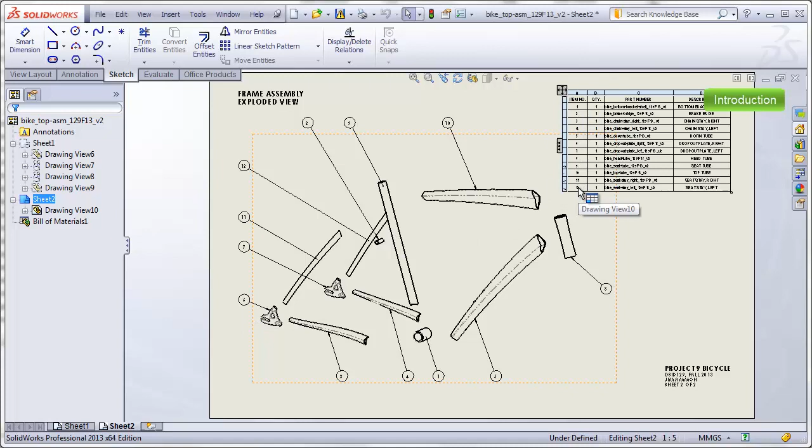The second sheet is going to show an exploded view of the frame components before they are welded together. This sheet includes a bill of materials for the frame and bubbles pointing to the various frame components that correlate with the item numbers in the bill of materials. We also have a little bit of annotation on both sheets.

Before starting, you should have your entire bicycle assembly completed. However, don't worry if you have to go back and make changes. Those changes will be reflected in the drawing.

You also need to have an assembly file of the bike frame components completed, and this assembly file needs to have an exploded configuration added to it.

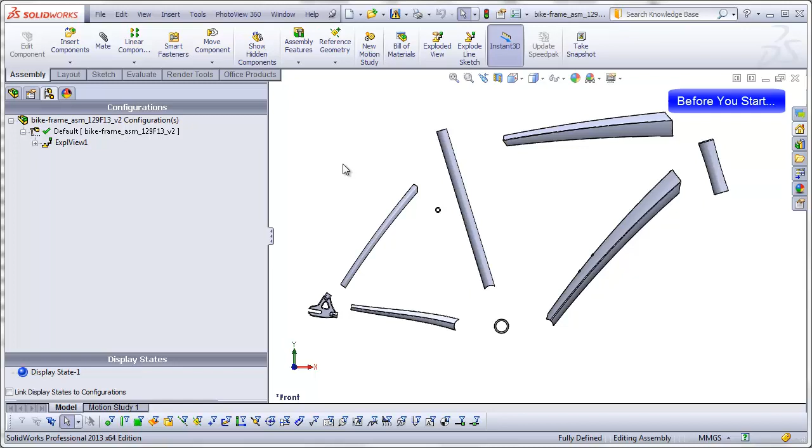Ideally, when you made this exploded view, you did it with a particular viewpoint in mind that you're going to be seeing when this explosion is in the drawing. In my case, I made a custom view and saved that view. In this case, it's custom ISO, and this is the orientation I plan on seeing in my drawing.

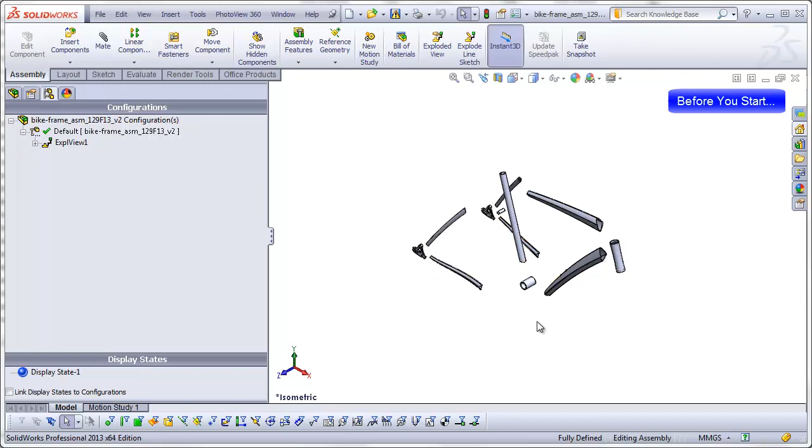It's possible that you did not make a custom view and were planning on just using the isometric view, or maybe you weren't thinking about a custom view when you had the frame oriented a particular way. If you want the frame to be oriented a particular way in the drawing, make sure you have it oriented while we are looking at the assembly.

Hit your space bar, click on New View, and then type in a new view name for that, and OK. Later, when you insert this assembly into your drawing, you will actually be able to pick this custom view for the drawing.

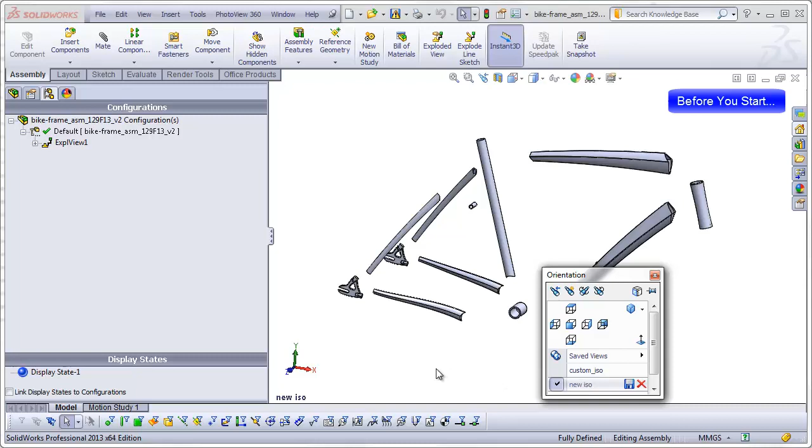Now, before I start, I think it's convenient to have both my bicycle top assembly and my frame assembly open in Solidworks. Now I will begin the drawing process by going to File, New, Drawing, OK.

For this drawing, we want to use a B-size sheet, which is 11 by 17. We have an option of displaying a sheet format. This is the type of sheet format that's often used in engineering documentation, but as I mentioned before, we are just making an industrial design concept, and this won't be a controlled document. So I'm going to uncheck Display Sheet Format, which is going to leave us with a blank sheet, and I will say OK.

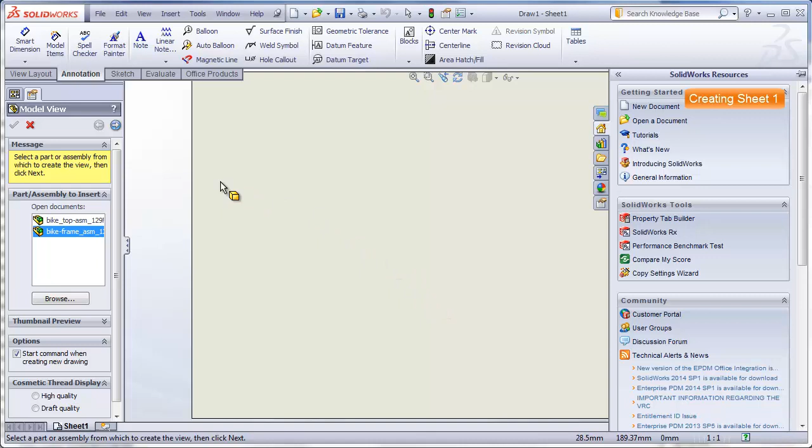For now, I'm going to X out of this Model View Feature Manager. Let's get rid of this, and that's going to leave us with a blank sheet that's 11 by 17.

Here in the feature tree, we see Sheet 1, and down here we have a tab that says Sheet 1. The first thing we want to do is right-click on that tab, go down to the bottom where it says Properties. Unfortunately, this is appearing off of the camera view, so I click on Properties.

This brings up a box that indicates the scale that the sheet is set at, and it also has the projection type. First angle projection is used in Europe, third angle in the United States. We definitely want to make sure that this is checked on third angle. Now we can say OK, and we are ready to add some views to this drawing.

Go to the View Layout tab and click on Model View. This will put into the Feature Manager box the 2 documents that are currently open, the top assembly and the bike frame. We want the top assembly.

We'll click on that, and if we're not sure if we have the right document here, we can always open up the thumbnail preview, which shows us what that document looks like. Then we have to go to this blue arrow that says Next, and we choose the view orientation that we want to use.

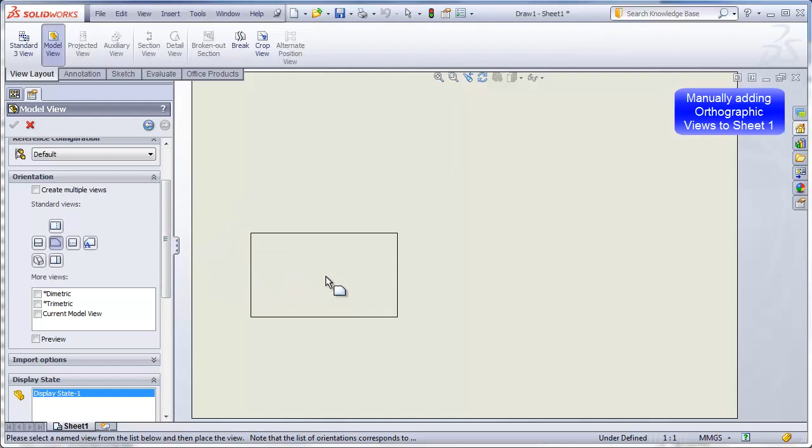The default when we add a new model view is to go to the front view, and that's what we want. So all I have to do is bring my cursor out into the drawing area, and we see a preview of the size of the view, and just left click down. And there is our view of the bicycle.

I'm going to hit the escape key and hide all types so I don't see all the sketches that were present in all the different parts.

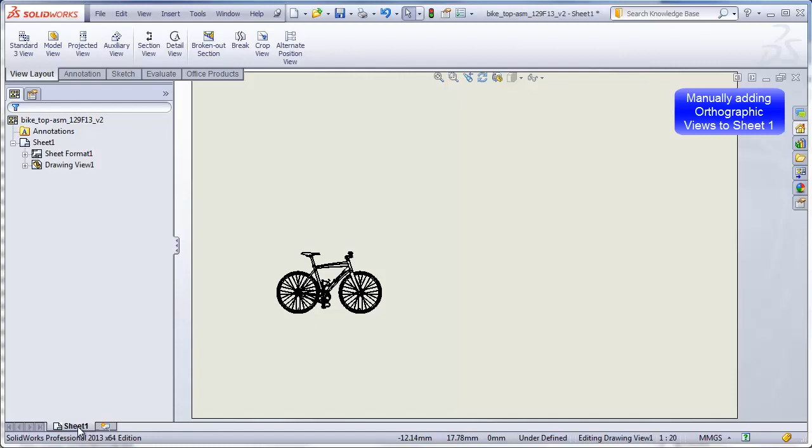Now, if we look at the bottom here, we see that SolidWorks has tried to help us with the scale of this view and has changed the sheet scale to 1:20, meaning we're seeing this at a scale of 1/20th of real life size. If I right click on sheet 1 again and go to properties, I see here it's also been set to 1:20. I think something like 1:4 scale is going to work a little better.

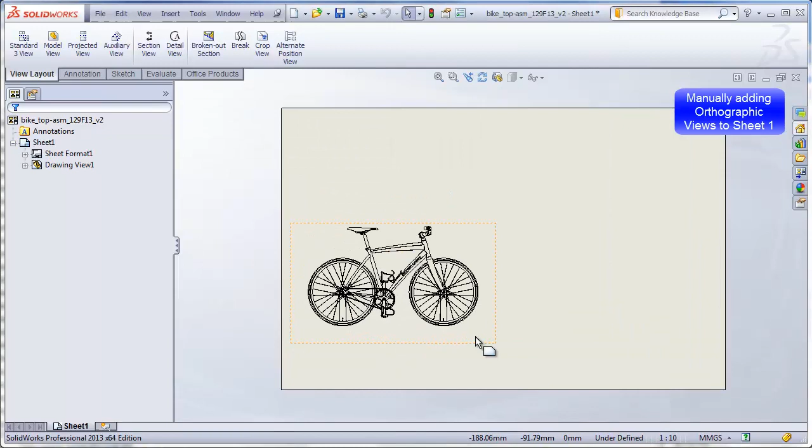Actually, that's way too big, so let me try one more time. I will change this to 1/10, and that looks like it'll probably fit when I add some additional views. We can change this as many times as we want.

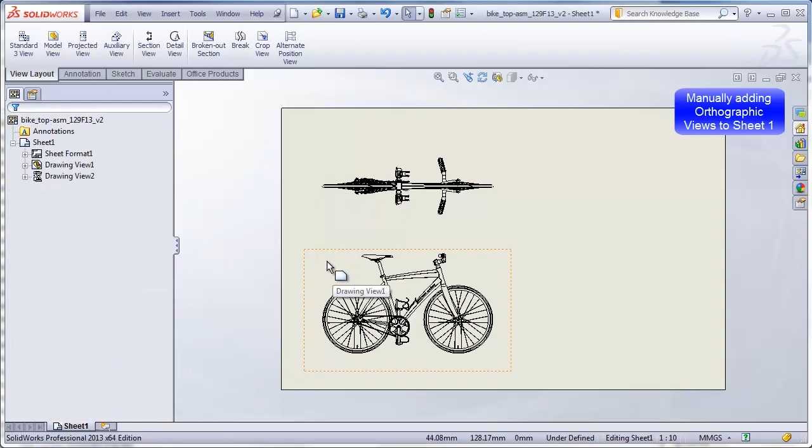I've got my front view. I'd like to have a top view and a view on the right side, which is actually looking straight at the front of the bike. Clicking on this view, I now go up to projected view and drag upward, giving us our top view. Now clicking on our front view again and projected view, this time dragging in this direction, gives us the right side view.

If I drag to the left, we see a left side view, and if I drag downward, we would get a bottom view. Now we want to add that isometric view over here.

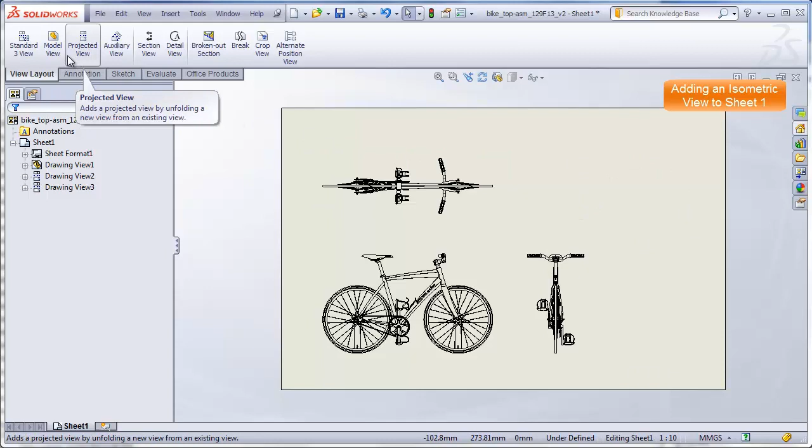So once again, we have to hit model view because this view will not be projected from any of these views. We're already set up for the top assembly, so just hit next. This time we want to select an orientation that is isometric and drag this out into place.

SolidWorks has again tried to help us out by making this a scale that is way too small. If we simply click on this view, it opens up a feature manager just for this view. And if we scroll down to the bottom, we see that SolidWorks has assigned a custom scale to this view instead of using the sheet scale.

If we want this view to match the sheet scale, all we have to do is click on Use Sheet Scale, and we see the view has gotten larger.

And there's no reason why this has to be at the sheet scale. We can always make this a little bit bigger or smaller if we have to, just by going to Use Custom Scale, going down to the User-Defined pull-down, and then choosing the scale we want. If none of those satisfy us, just click on User Defined, and that lets us type in exactly the scale that we desire.

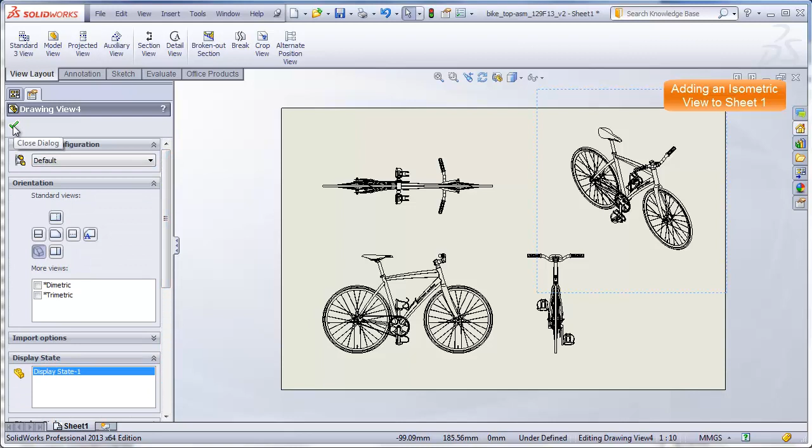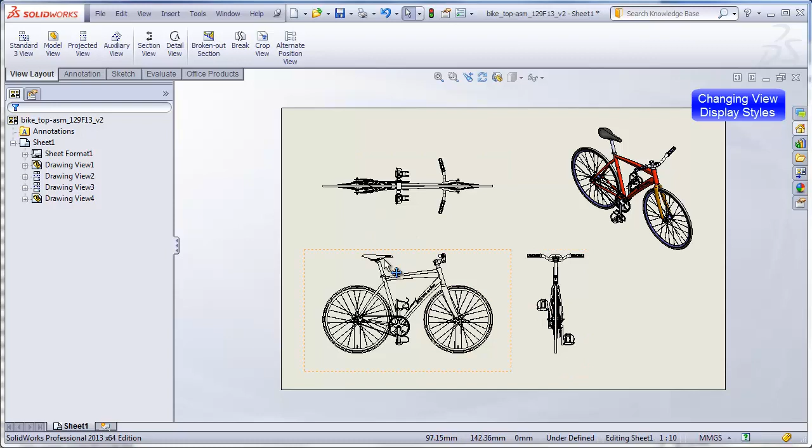I mentioned before that I wanted this view to be shaded, so I just click on this view, go up to here under Display Style, and this is the same display styles that you normally find in your part files, and we will go down to Shaded with Edges. This display style for the orthographics was set to default to Hidden Lines Removed.

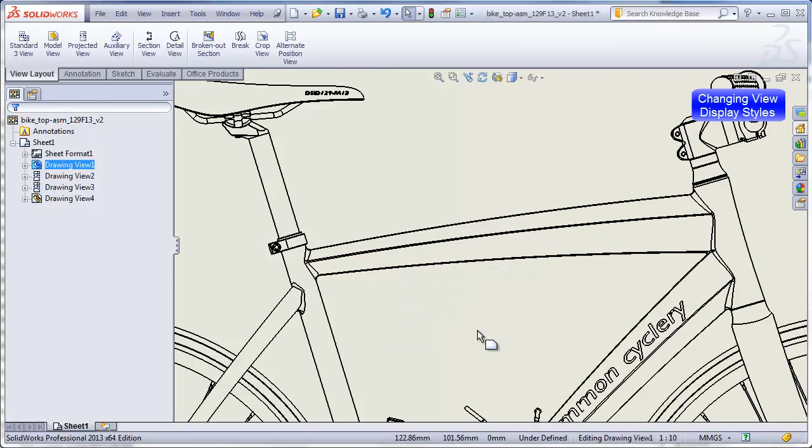If it didn't default to that, all you have to do is change that with this control. If we zoom in, we see that all of the lines are showing, including the tangent lines. And this can get very distracting in a highly detailed drawing like this.

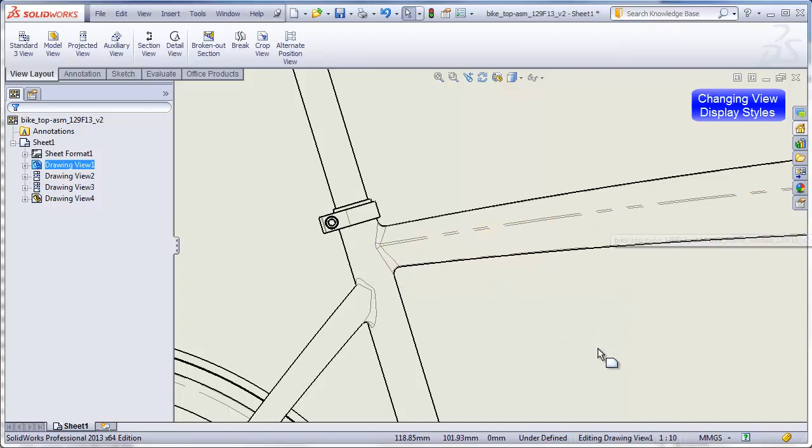So what you can do is right-click on the view, go to Tangent Edge, and set it to Tangent Edges with Font. It changes the tangent edges to have a centerline style font at a thinner line weight. So you can still see the tangent edges, but they're a lot less distracting. I find this to be more pleasing to look at.

Now you have to do this for each of the views individually. It won't update the other two views if you do it on the front view.

On the shaded view, you might consider another option. Right-clicking on that view and again going to Tangent Edge, you might want to change that to Tangent Edges Removed. That will leave the edges wherever parts come together, but those tangent edges will just be seen by virtue of the shading and not by virtue of any lines.

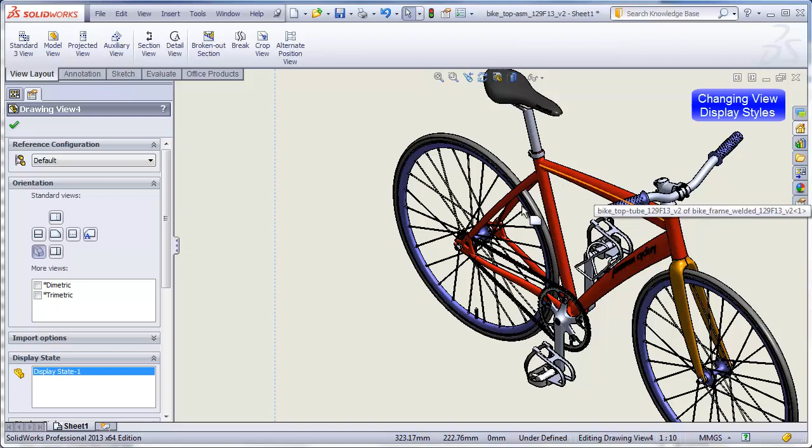Now we added a front view, top view, and right side view, and these are actually the standard 3 views. So if I delete these, I can show you a different way to add these views.

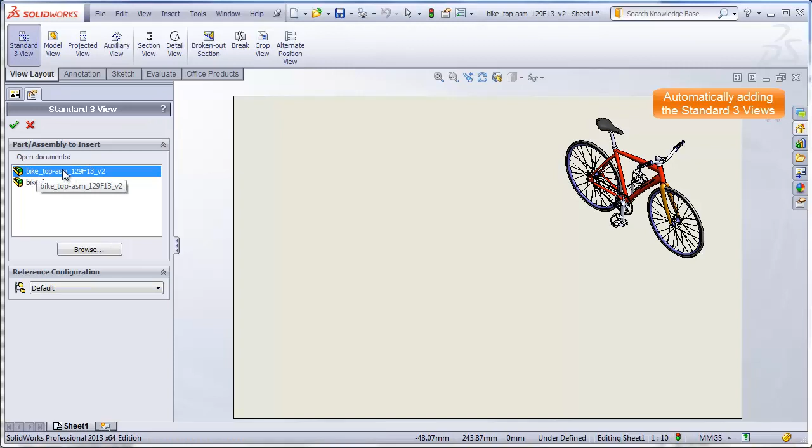I click on the standard 3 views, select once again my top assembly, hit the green check mark, and that drops in the 3 views for me automatically.

Unfortunately, it decided to rescale them once again, so I have to go back to my properties, right click, go down to properties, and I see that the properties haven't changed, so it must have changed the scale on the view itself.

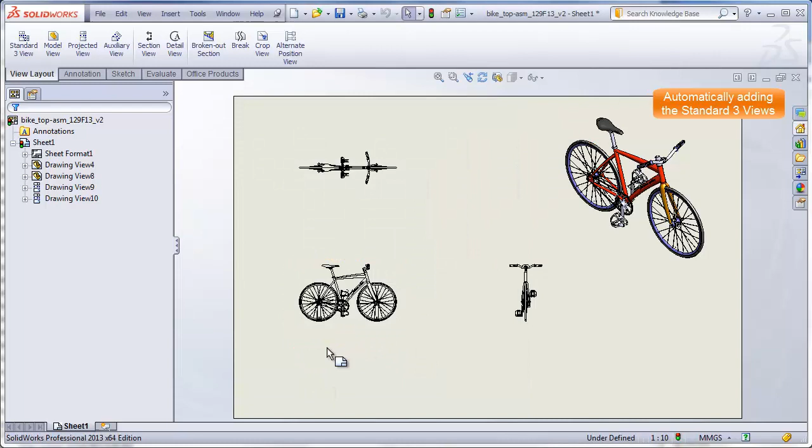So clicking on this view and going down to the bottom, I see yes, it did change it to a custom scale, so I just use sheet scale in this case, and that has brought it back to the scale that I want. I would have to go back and change those tangent edges again.

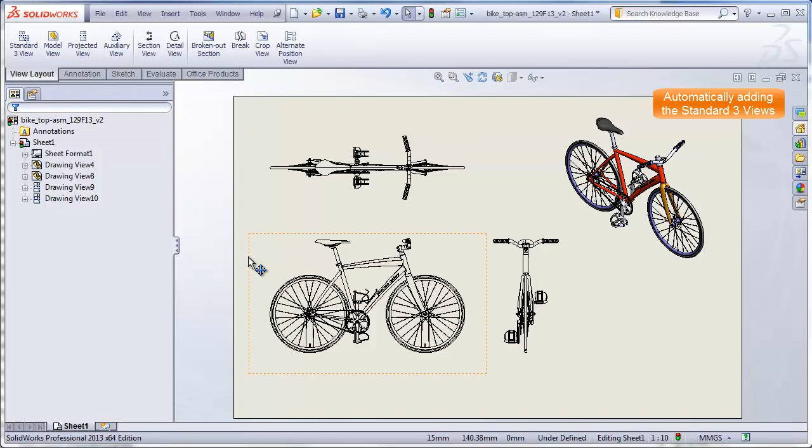So this is just 2 ways to add the views. Using the model view and projected view gives you more versatility. Using the standard 3 views always gives you the front, top, and right.

Before we add our second sheet, I'll point out that in the feature tree, we have sheet 1, and under sheet 1 are 1, 2, 3, 4 drawing views. Drawing view 4 is this isometric view. Drawing view 8 is this front view. Views 9 and 10, which have different icons on them, are projections off of this drawing view number 8.

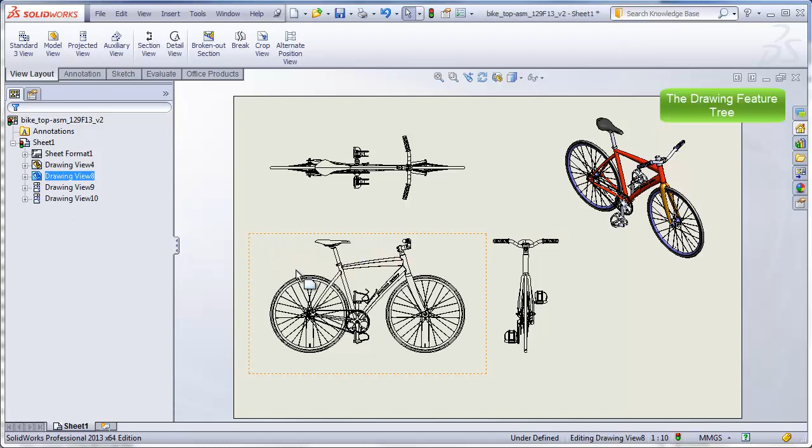Now we are ready to add our second sheet. Go down to the Sheet 1 tab, right click, and unfortunately again I can't get this to show on the screen, but the second selection down says Add Sheet, and that brings up a brand new Sheet 2 which is blank, and we see Sheet 2 popping into the feature tree.

For this sheet we are going to be adding the exploded frame. So we go up to Model View, and this time we choose the bike frame assembly, not the bike top assembly. We choose the next arrow, and we want to pick that custom view that we used for our explosion, and it appears down in this box here, not up here.

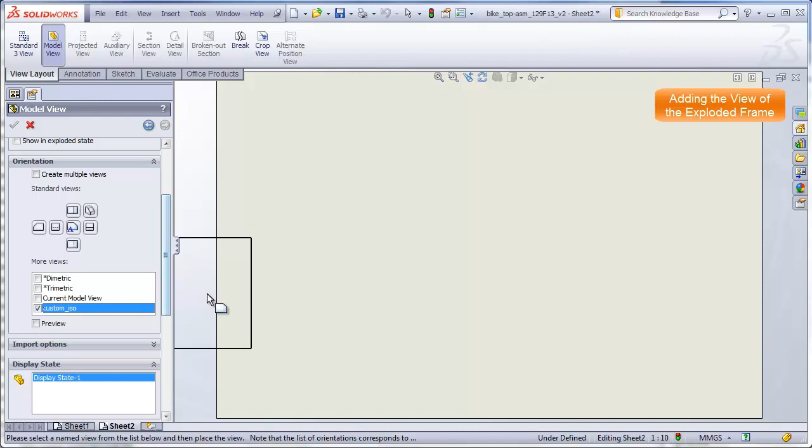So clicking on custom view, dragging out into my graphic area, there is the view of my frame. But we see it's not exploded. So right click on the view, go down to properties, and we see here show in exploded state. Check that, okay, and there's our exploded view.

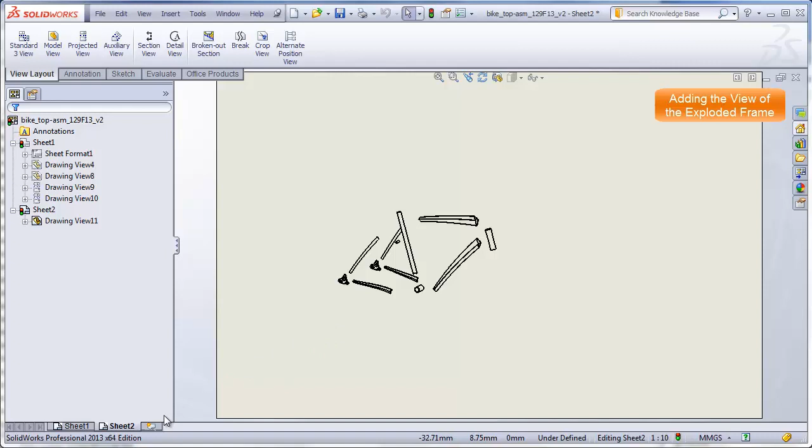Now once again SolidWorks has tried to help us with the scale, and once again it hasn't done a very good job. So I'm going to make the scale of this drawing about 1 to 4. Going down to properties, which again you can't see here, changing this from 1 to 10 to 1 to 4.

Now I'm filling up my screen a little bit better. That might be just a little bit too big, so let's change that to 1 to 5 because we need some room for our bill of materials up here and some balloons that are going to go around the perimeter of the view.

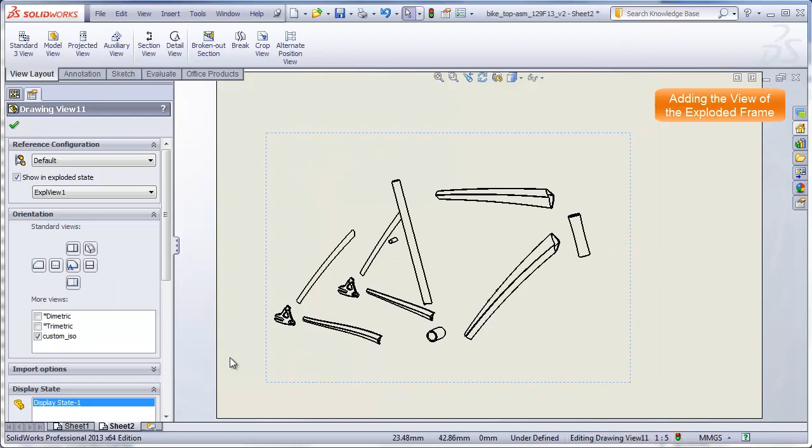Once again, we see all these dark lines along the tangent edges, so I will right-click on the view, tangent edge, and click on tangent edges with font, and that gives a softer look to all these tangent edges.

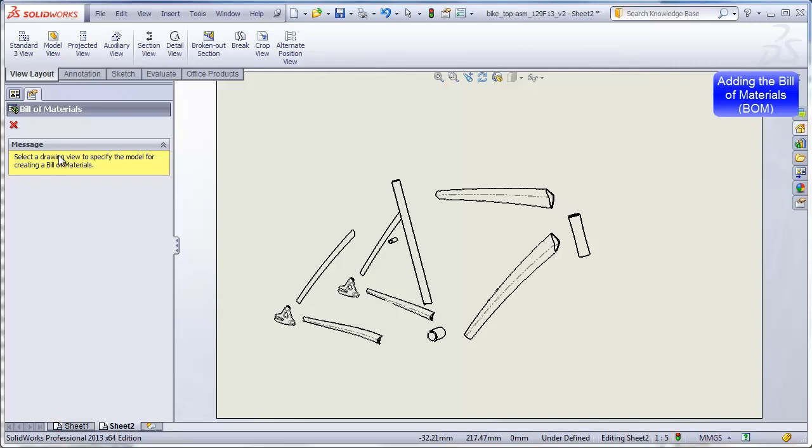The next step then is to add our bill of materials. So we go up to Insert, Tables, Bill of Materials, and it asks us to select a drawing view to specify the model for creating the bill of materials.

Well, the view is our frame explosion here, so I just click on that view. I can accept all the defaults that are here in the feature manager. There should be nothing I have to change. And then I can just click on the green check mark here and drag out to this corner my bill of materials.

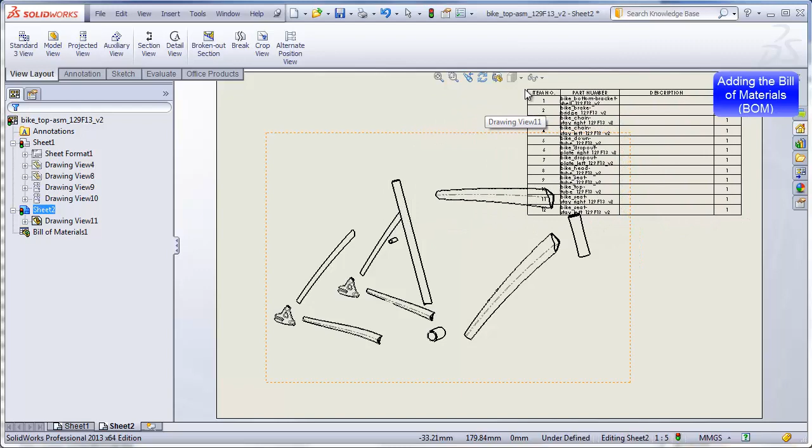Zooming in, we see that this is taking up quite a lot of room and is interfering with our view here. So we want to fiddle around with this a little bit to make this a little smaller.

One thing we also notice is that we have 4 columns: item number, part number, description, and quantity. The part number defaults to the file name of the component that was inserted into the assembly. Normally in an engineering organization, it's common for the file name to be named after the assigned part number. So that would pop into this column. Then you would have a description explaining what that part number is. So you see right now this part number is so long that it's filling up 2 lines in each of these boxes.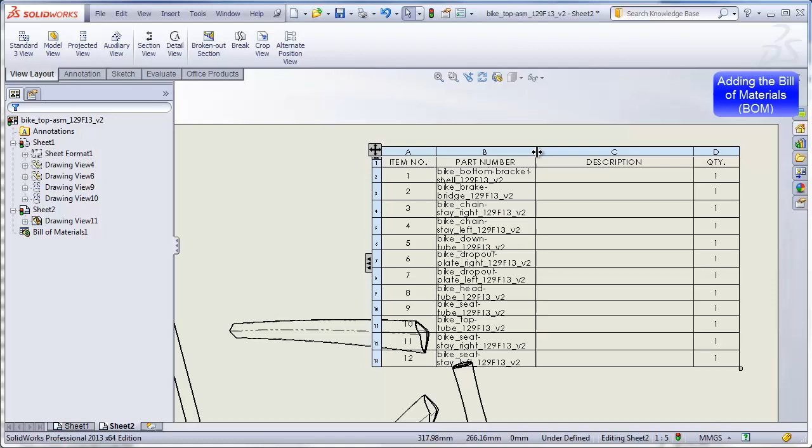So I can grab this just like a spreadsheet, and with my left mouse button drag this out far enough so that I don't have any two-lined part numbers. So now everything is on a single line, and I can use this arrow in the corner to pull this back into place.

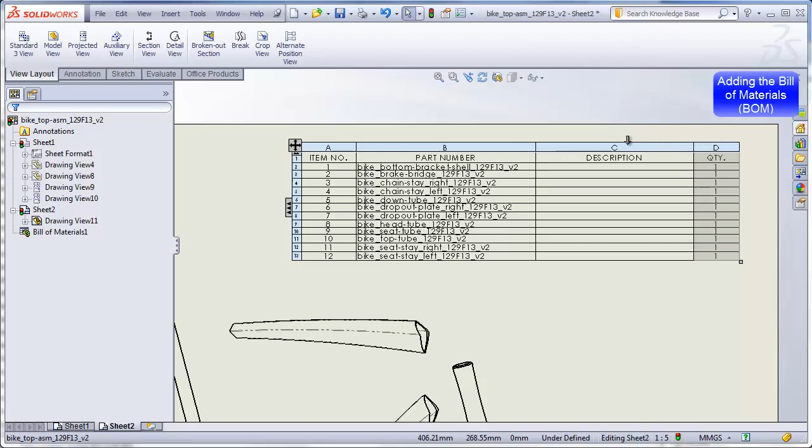Most bills of materials I've seen always have the quantity immediately following the item number. If I click on this column, get this arrow, and very slowly drag to the left—if you do it too fast it doesn't want to work—I can rearrange the order of the columns and put the quantity right between the item number and the part number.

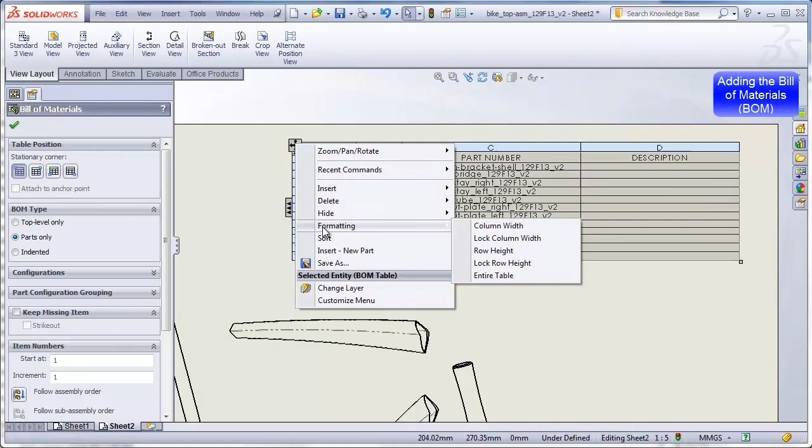Now we see that this is pretty crammed in here, so we can fix this by right-clicking in the corner of the table, going down to Formatting, and then choosing Row Height. A good row height is about 6 millimeters, which neatens everything up and makes it consistent.

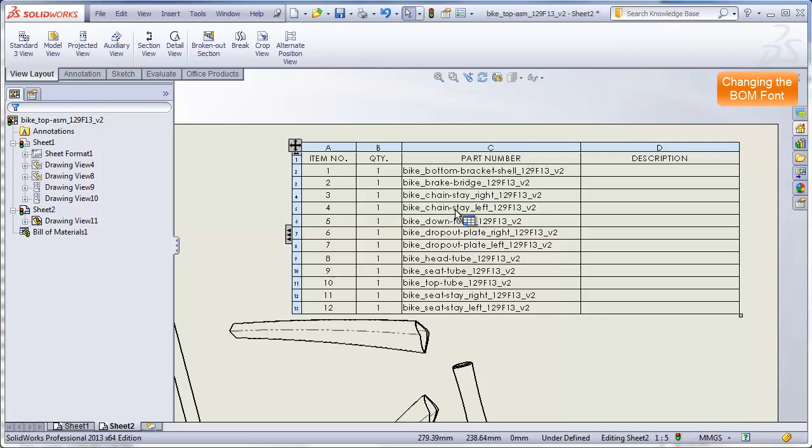If this is still taking up too much room, you can change the font used in the table. Right now this defaults to a 12-point font, and it's fairly wide, so we can choose something else by going up to our options, selecting Document Properties, then going to Tables, Font, and choosing something other than Century Gothic, which is a fairly wide font. We can choose something like Arial—I'll type it in here—and select Narrow, and maybe make the font a little smaller too. We'll change this to points, and make it a 10-point font instead of 12-point. Then we say OK, which is unfortunately down off the bottom of our screen.

Now what you see is it's made the font a lot smaller and a lot more compact.

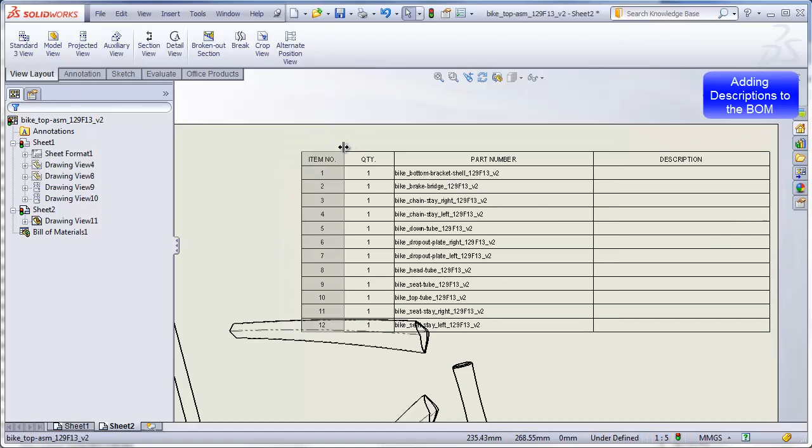Now that we've done that, we can start tweaking these columns a little bit to get ourselves a nice, tidy bill of materials. I can move this over to the corner here a bit more and move this view a little farther out of the way.

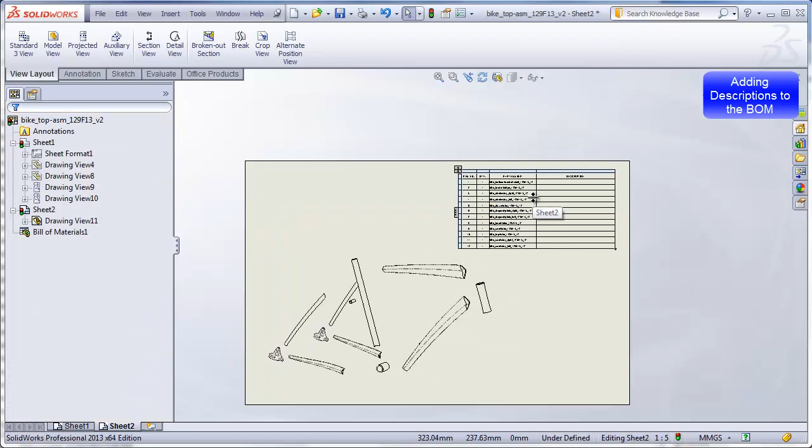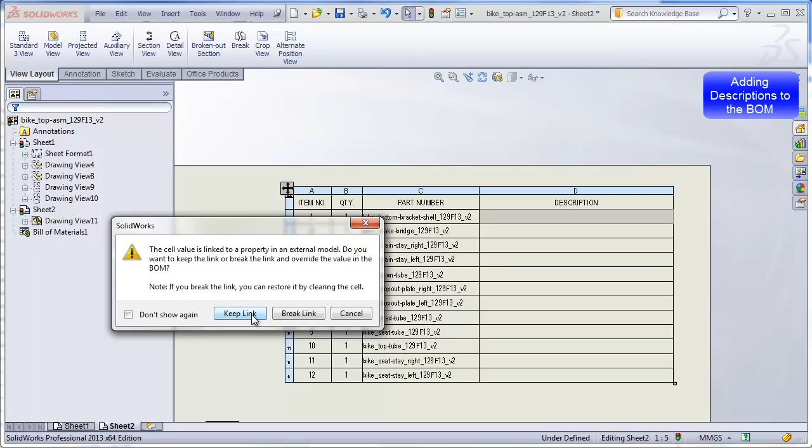Zooming back in here, we need something for the description, so we can just type in the description at each of these spots. Starting with the bottom bracket shell, I'll double click on this box. It says the cell value is linked to a property in an external model—I want to click Keep Link. What happens is when I type into this cell, it will add a property in the file for the bottom bracket shell. If I ever use the bottom bracket shell elsewhere and make a bill of materials, the description will automatically fill that bill of materials the second time around.

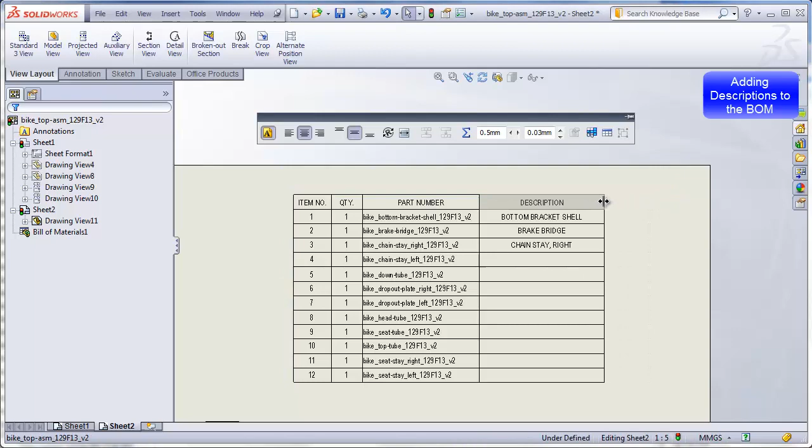So here I'll type in, using capital letters, bottom bracket shell, and move on to the second one. It's going to keep asking me if I want to keep the link, so I'll say don't show again, keep link. And here I'll type in brake bridge and keep moving along, chain stay right—I won't bore you typing all these in—but you can see this column is wider than it needs to be, so we can go back and resize this a little bit, and move this off in the corner to make more room for the rest of the drawing.

Now that we've done that, we can start adding the balloons that correlate with the item numbers in the bill of materials. Move that over here a little bit. To do this, we go to the Annotation tab, and we have a choice of manually adding the balloons or using the Auto Balloon command.

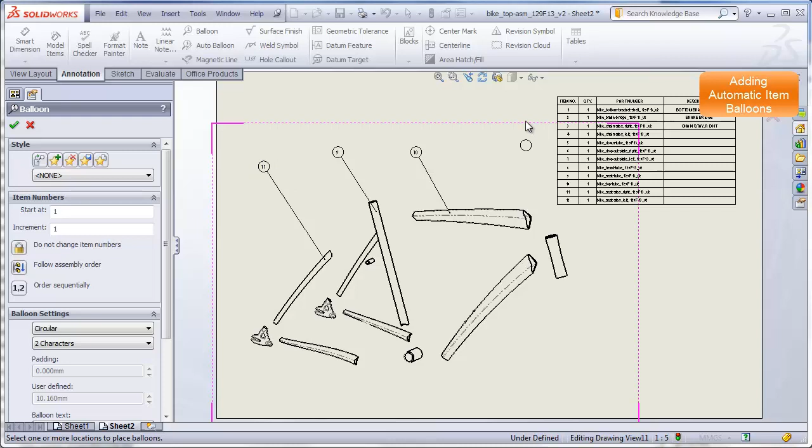If we manually add the balloons, we have to check each item one at a time, and it adds a balloon with a number that corresponds to the item number in the BOM. Let me delete those.

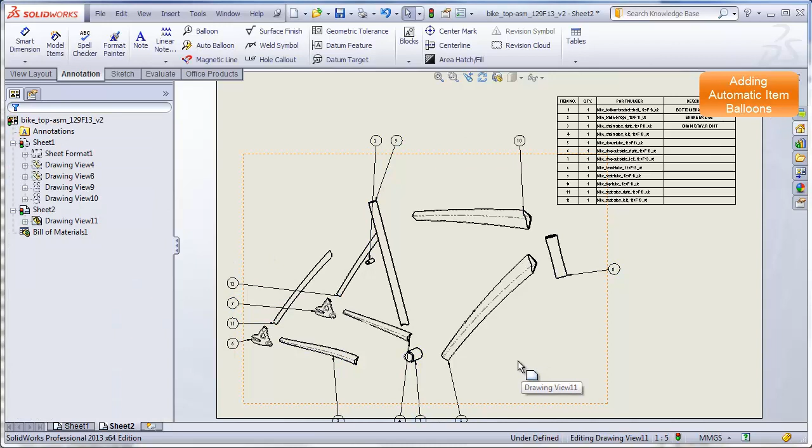The other method is to use the Auto Balloon. If I click on that and click on the drawing view I want the balloons added to, you see it's automatically added all of these balloons. It's in a somewhat haphazard orientation, so now you have to go clean this up. If I click on any balloon, you'll see it has this magnet line, as it's called, that the balloon is attached to. The nice thing about this magnet line is that the balloons attached to it drag along with the magnet line and give us a nice, neat look to the layout of the balloons.

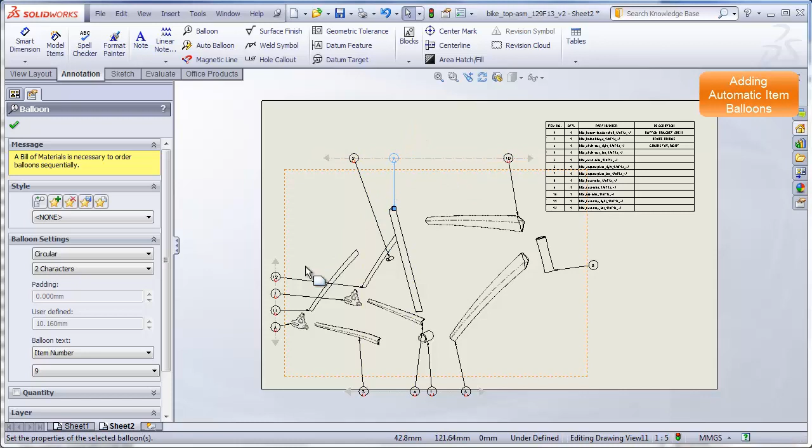You can drag the balloons independently of each other while keeping them on the magnet line, or you can drag them off the magnet line. So you just move this stuff around until you get a more pleasing layout with none of the balloons going off the edge of the sheet or interfering with each other or with the BOM.

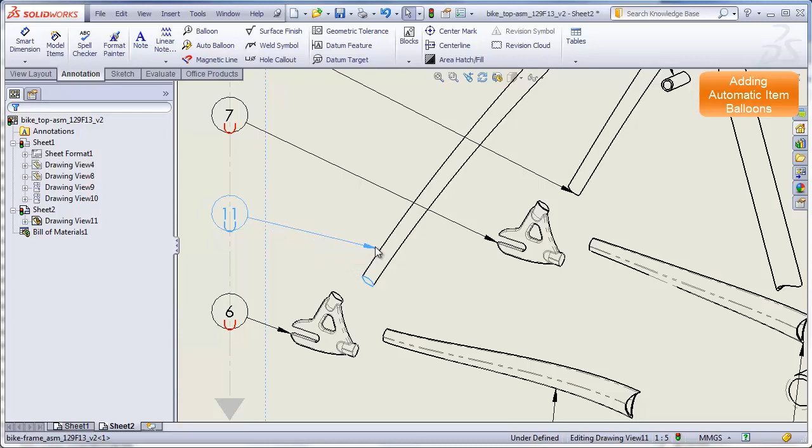You might also want to tweak where the arrows are actually pointing. Sometimes they might not point exactly where you want, so you can grab the end of an arrow and move it somewhere else. If you move the arrow onto an edge, it stays as an arrow. If you move it to the center of a surface, it turns into a dot. You see this little U shape - it isn't actually a U, it's supposed to be a magnet, so it indicates that this balloon is attached to this magnet line.

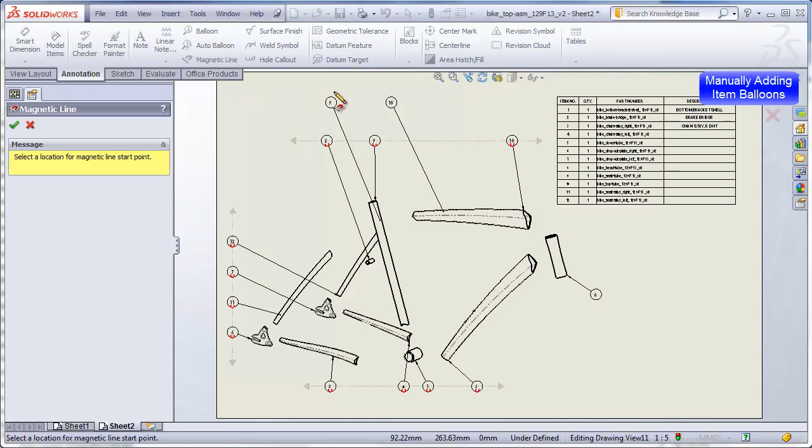If you use the manual method of adding balloons, you still have the ability to add a magnet line if you want. You can just click on one of the balloons to add a magnet and drag that out, and even pick up other balloons, and that gives you a magnet line that way. Sometimes I find it more convenient to add the balloons manually rather than using the auto balloon and then having to go back and tweak each and every one to get it to look good.

Now let's assume that you've got everything just the way you want it. We have just a little bit more documentation we want to add - we want to tell somebody looking at the sheet what it is, when it was made, who's responsible for it, etc. So we go up to Note, which is under our Annotations tab.

Click on that, and we can just drag a note off into this area. If we click the note down while we are highlighting a view, that note will be attached to the view and will move if the view is also moved. So we want to try to get this off of the view and click off into this area.

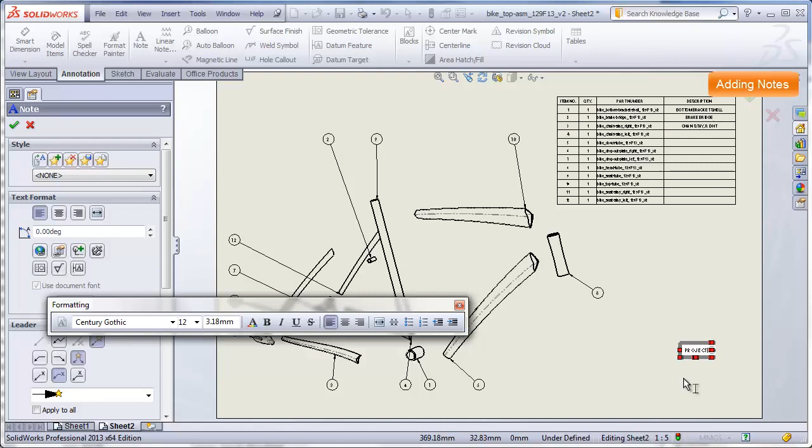I'm going to type in Project 9 Bicycle - let me zoom in a little bit on that. Return. DSID129, fall 2013, and maybe today's date, 12/14/13, my name, and finally, sheet 2 of 2.

Since this is the title of the drawing, I might want this to be more prominent, so I can highlight this with my left mouse button and change the font on these particular items I've highlighted. So I'll change that from 12-point font to about 16, and I can even make that bold. So here we see the title and then the additional information.

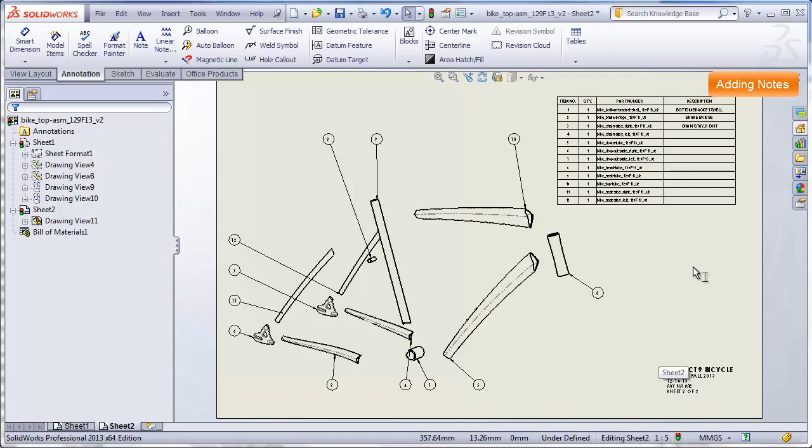I want to add a similar title to the front sheet, but I don't want to go through the trouble of retyping all this. So I just click on this, Control-C for copy, move to sheet 1, click in this area, Control-V for paste. Now I just zoom in again, and of course this is sheet 1, so I just edit that by double-clicking, changing that to sheet 1.

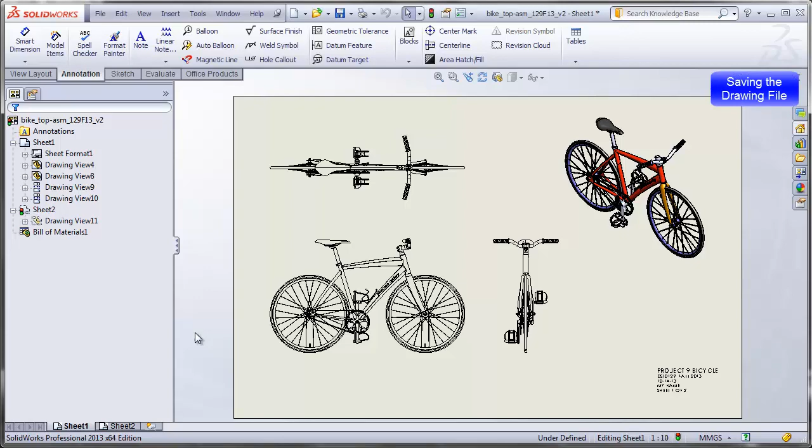So that's pretty much it, I'm done with the drawing. I can now save it, and I probably want to just leave the default name. Default name of the saved file will be the name of the first part that was inserted into this drawing, which was our top assembly. So that seems like a pretty good name in this particular case.

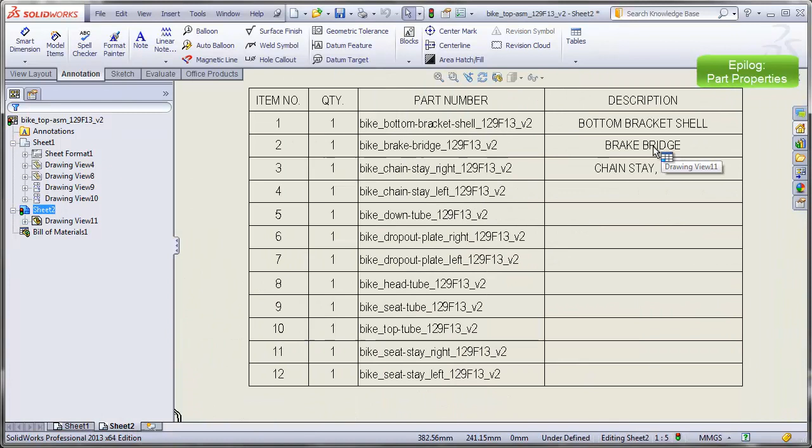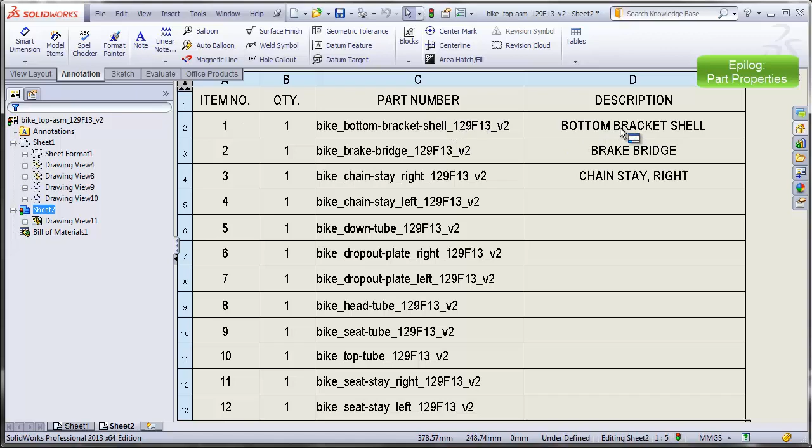Before I close this video, I'll go back to sheet 2, and I mentioned earlier that when we type a description into this column, it will automatically update a property in the part file. So let's go to this bottom bracket shell, for example, and see what I'm talking about. If I go to File, Properties, this Properties box opens up, and I have properties that can be added to any part. In this case, I have a description property that's been added into this file, and under the value for that property is bottom bracket shell.

And this is what I had typed in the bill of materials, so that's linked, that bill of materials, to this property. When I save the bottom bracket shell, this property will be retained in this file. And again, if this is reused in another bill of materials, it will automatically appear in that bill of materials. So that completes this drawing and the entire final project for this semester. Congratulations.